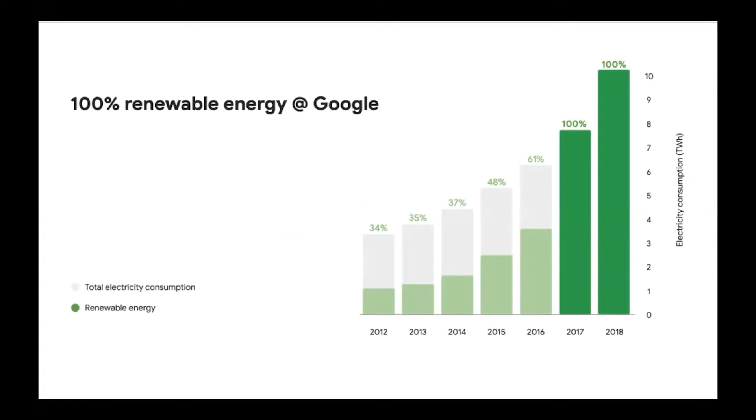With that position comes great responsibility, and we take it very seriously in plotting a chart for what we're going to do next, so that we can lead the way in showing the world how clean energy can be done. One of the biggest goals—I showed on the previous slide that we hit 100% renewable energy back in 2017 and 2018.

Continuing to meet that goal is increasingly challenging as our energy demand increases. So we look to ways to continue fulfilling our commitment to hit 100% renewable energy.

At the same time, we've also set another really ambitious goal: 24/7 carbon-free energy, meaning we want to be using carbon-free energy—wind, solar, and so on—even when the wind is not blowing and the sun is not shining. That's our next big audacious goal.

Let's talk about some trends we're seeing in the renewable energy industry and how technology is addressing them. There are three themes I'd like to talk about: one, how can we use technology to increase efficiency through visual inspections of wind farms; secondly, how can we predict failures and anomalies using technology and artificial intelligence; and third, how can we optimize energy storage through things like batteries.

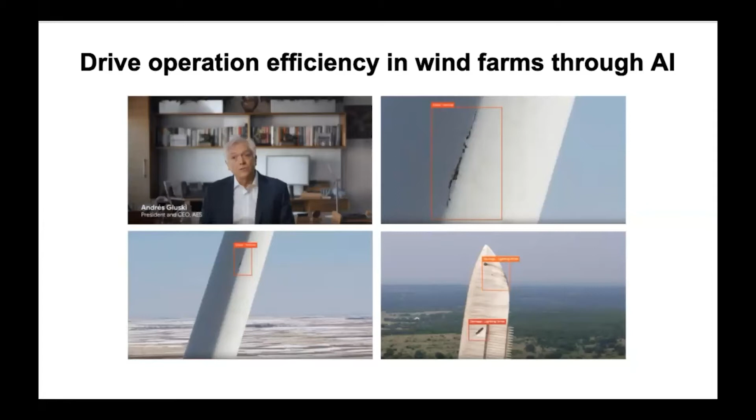Another trend is using technology to predict failures and anomalies. I talked earlier about using visual inspection AI models to identify damage to wind turbines. The overall goal is to reduce total unplanned downtime and minimize the amount of revenue loss coming from such activities.

We can combine the visual inspections from those images with additional data, combining that with the wind turbine's SCADA data to get a better picture of when things might fail. There are hundreds and hundreds of sensors in each and every wind turbine, and we can look for anomalies in that data pattern, things like vibration patterns, to see when things are getting out of whack.

When that happens, it gives us a signal that maybe there's something wrong. Combining the insights from inspecting the images of the wind turbines gives us more accuracy in predicting a potential failure, which can be really helpful in preventing catastrophic losses in a wind farm.

We also want to combine that intelligence with time-based scheduled maintenance, meaning operators of wind farms may already be planning to take down a turbine for regular maintenance, like an oil change. If we're predicting a particular turbine will fail because of these signals, we can combine that with the time-based maintenance so we're taking down the turbine hopefully just once, minimizing total unplanned downtime.

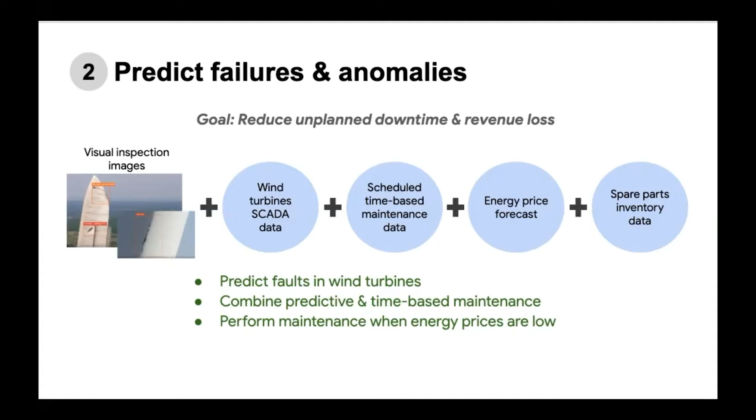Finally, you want to combine all that intelligence with your spare parts inventory, meaning if you're planning to take down a wind turbine for maintenance, you better make sure we have the spare parts in hand, so we're not caught predicting a failure but not having a certain part ready.

The third trend has to do with energy storage. We're seeing an increase in the capacity of energy storage. This chart from the IEA shows the amount of capacity for storage from 2013 to 2018.

And you can see that fairly exponential increase during these years. We're expecting that the forecast for energy storage capacity will continue to increase in the years to come. And there are several business cases for why people want to increase their capacity for energy storage.

From a power utility standpoint, batteries are useful for emergency power restoration so that if the power goes out in the grid, there's some capacity to ride through these power outages. There's also the business case of using grid energy storage to balance the intermittency of solar and wind power generation.

From a monetization perspective, there is the interest to optimize the charging and discharge cycles so that we can make the most amount of money to take advantage of fluctuations in energy prices during the course of a day. And this can happen in particular in places where there are those large fluctuations.

I know that last year there were some fairly extreme events that happened in ERCOT in the Texas area where the prices fluctuated to very high levels. So if you had an energy storage system where you can capture that energy during the lower price periods, you can sell the energy during the times when energy prices are much higher.

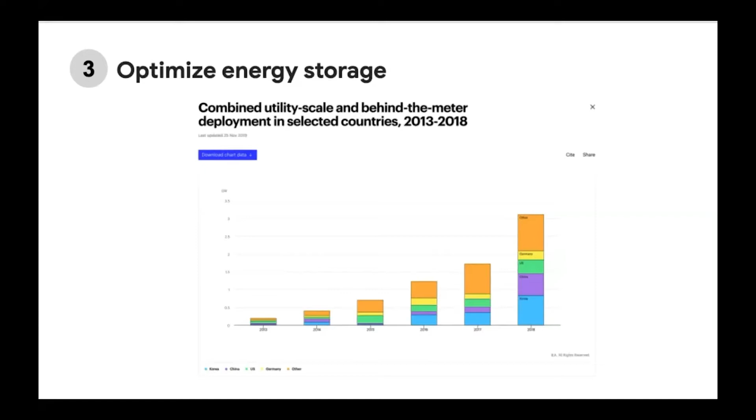And then finally, I mentioned earlier that Google has our ambition to do 24/7 carbon-free energy. We want to use carbon-free energy at all hours of the day. And we certainly know that the wind is not always blowing and the sun is not always shining. And so during those times, we want to take advantage of energy storage capabilities to help us ride those periods through.

So anyway, that is a short overview on what we're seeing in the power industry and particularly with regard to renewables. And I would welcome any questions that everyone has. Thank you.

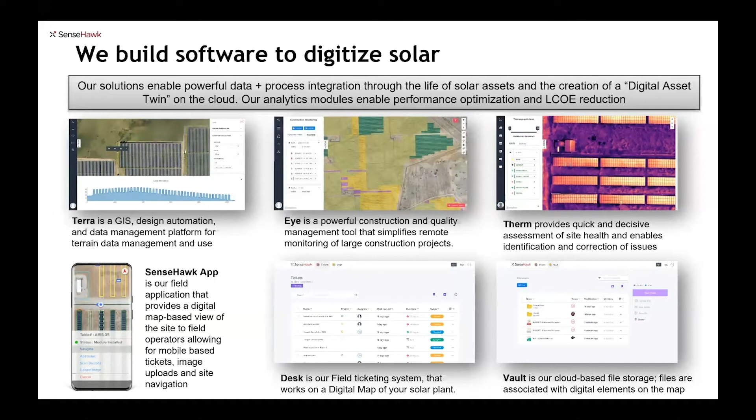App.sensehawk.com is Grand Central for all solar assets. Asset owners can look at all of their assets at different parts of the life cycle right here and click on any asset to get into detailed information.

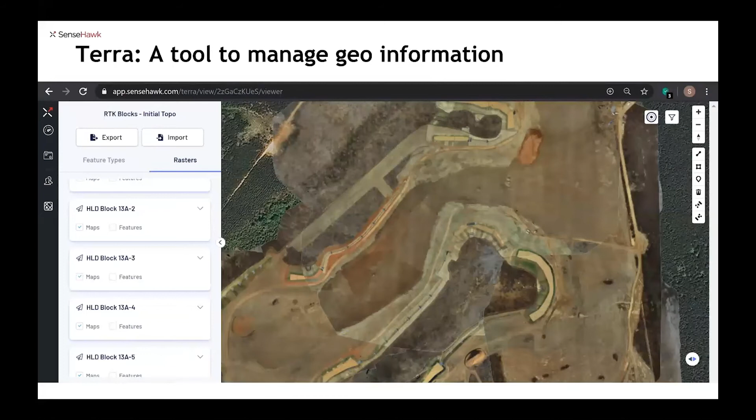Terra is a tool to manage geoinformation. You can layer in geoinformation from traditional manual surveys, from ALTA surveys, from drones at different parts of the construction life cycle. You can use this geoinformation, analyze this geoinformation to drive construction automation. Automated leveling and grading, automated pile driving, all of these are supported by our system.

Eye is a digital construction management tool bring in information from the site into offices and boardrooms, eliminating the need to travel. It combines data from drones, progress reports, information entered by site personnel, inventory, civil and electrical data, all of this together to provide a rich view of the site to stakeholders.

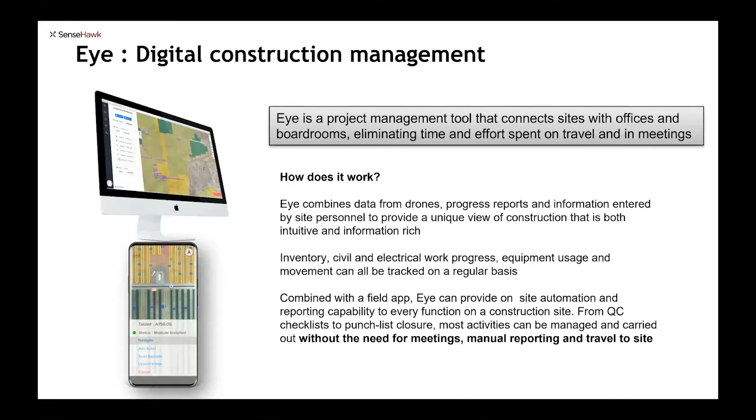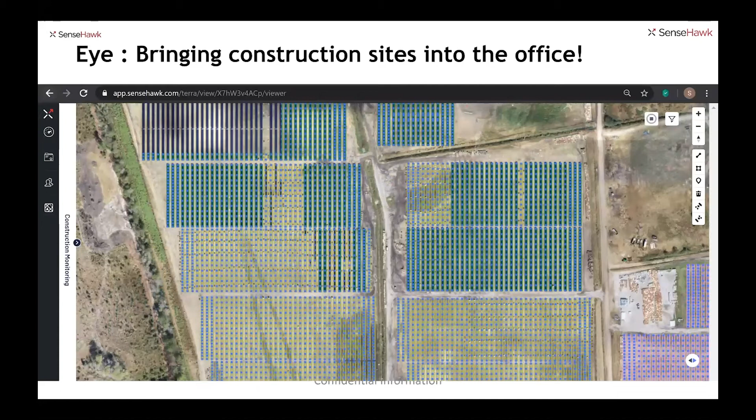Combined with the field app, Eye also provides a site automation and reporting capability to every function. So you can do QC checklists, punch list closure, most activities managed and carried out without meetings or travel. It actually brings you rich visual information from the site into the office. You can actually zoom in and see every part of your site.

Eye also supports asset information mapping. You can map serial numbers of every component on your site into the digital twin. Desk is a ticketing and work management solution written just for solar.

Combines with all of the other information we have to create a powerful work management system. It supports intuitive dashboards, enables people to monitor work sitting remotely across multiple sites. It also enables remote site management with actual visualization. You can look at your site, look at all of the issues, all of the tickets, all of the work

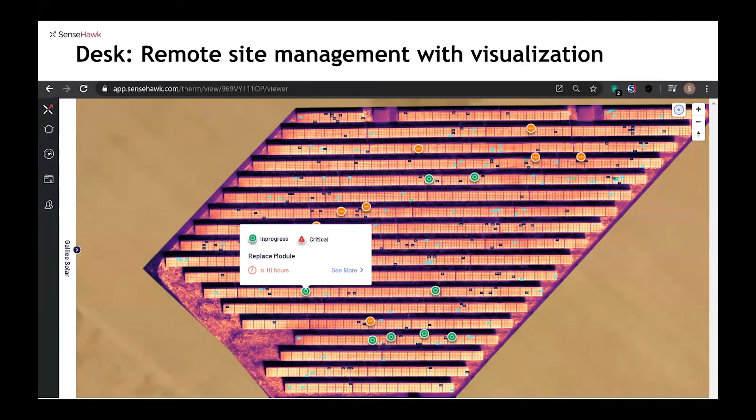allocated to personnel on the site, look for progress, look for criticality on a single screen. Vault is a data and file management system that's been written for solar, enables you to attach files to any element within the asset. This could be to an inverter, could be to a site, could be to a tracker

row, to an individual module, or the entire asset. The app is the most powerful tool in our arsenal. What it does is it brings all the information that we generate and that we analyze into the hands of people on the site. It runs on most handhelds that run Android or iOS. It's map-based. It has GPS.

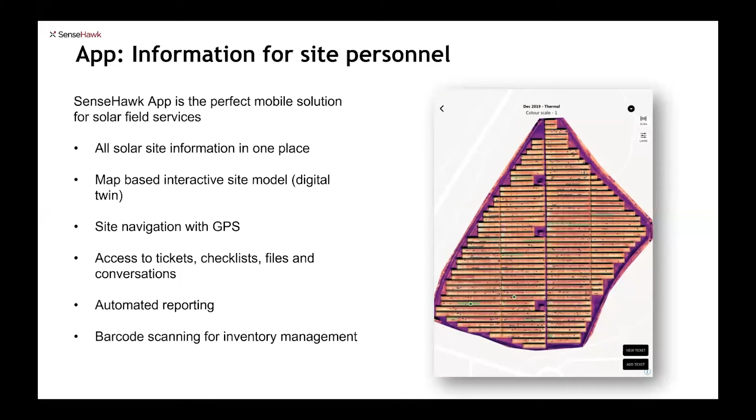Think of it as Google Maps for your sites, along with all the information for your site that you need. It's offline capable. You can create tickets, access work, access checklists. You can complete checklists. You can do automated reporting. You can access files. You can start conversation, raise issues. Anything that you need to do on site is available on the app.

What our software together can do is help you increase asset yields, enhance productivity, and improve efficiency, while at the same time reducing the need to travel to sites, reducing costs associated with all of the management of work on sites, and most of all, in the current scenario, enables you to stay safe. Thank you all for your time, and I'd love to get more questions.

We should have some more questions for you. Swaroop, do we have you on the line? Yes. Can you hear me? Yes, I can hear you loud and clear.

One of these questions coming in is, can you share more about your customer traction? Well, we have customers in 17 countries, and about 20 gigawatts of assets have been through our platform. Some of them are still being used, while others we did portions of their workflow.

Got it. And can you integrate with environmental data such as weather to build a digital twin that predicts output or performance? That's the eventual goal. Currently, we can do process data, all of the inventory and part information, technical information. We are layering SCADA data on top of this. So the next step is to add weather and other information that comes together. So the idea is one day you should be able to look at any solar site and build a unique performance model for that site based on all of the components that are on site, history of performance, and the weather and everything else.

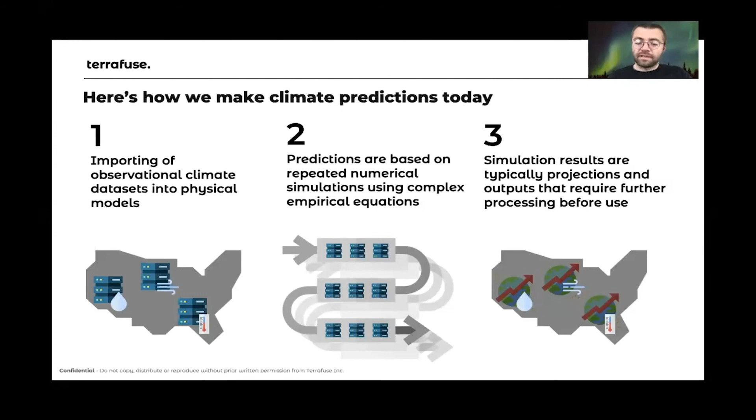This is because current technology for modeling and predicting climate is based on an antiquated paradigm of numerical modeling, whereby very complicated equations defining climate processes are encoded by hand by teams of PhDs and solved on big, expensive supercomputers that are typically outside the reach of most institutions. This is a highly computation-intense process that takes months to create predictions and simulations. It's impossible to assimilate the vast volumes of data that we're generating and collecting more and more on the Earth's climate. And even after all this work, the data that comes out of the process is still not granular enough and timely enough to inform business and policy needs to be actionable in general.

We address this issue with our AI emulation technology. An AI emulator is a machine learning architecture that learns to behave like a physical system, such as wind or wildfire. We build AI emulators by fusing together many sources of remote sensing and simulation data about climate. We use the AI emulator to scale climate prediction across large regions by learning physics in some regions and transferring that learning to other locations, making predictions without having to solve the physics.

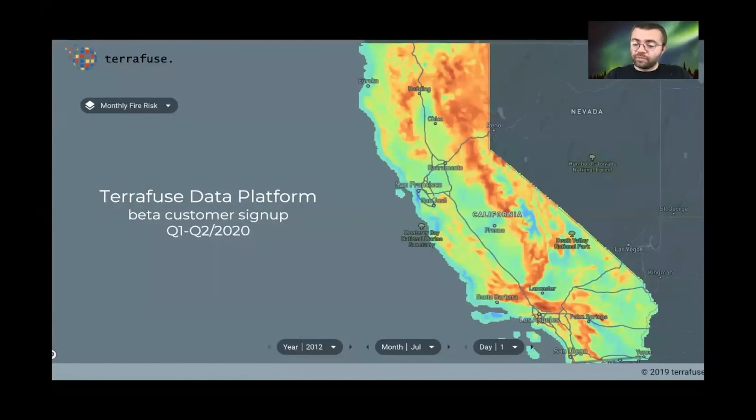We're building our minimum viable product, the TerraFuse data platform, on which the AI emulators get deployed after being validated with customers. We are developing applications around prevention, mitigation, and planning of climate risks to infrastructure, in particular renewable energy and built infrastructure for the energy and insurance markets.

Within renewable energy, we have focused on the wind generation market, which is the highest growing renewable resource at 30% year-on-year growth. We have been working with partners across the value chain of wind project development, from site assessment to operational market bidding to insuring the revenue from the wind farm, showing how our data can create value with multiple touchpoints.

A second market that we have focused on is insurance, in particular on wildfire for property and grid resilience. Wildfire has emerged as a first-tier peril in recent years, with insurance carriers incurring significant losses, especially in California and large markets such as the West.

However, all of the underwriters we've been talking to point to a lack of good data to price and select wildfire policies, leaving a lot of money on the table. So the need for more actionable climate data is evident, as our pilot projects in energy and insurance across the world show, from Asia, Europe, and the US. We have the team to build the solution for the climate prediction problem with machine learning and climate expertise, as well as clean tech go-to-market expertise. I'd be happy to take questions, so thank you for your time.

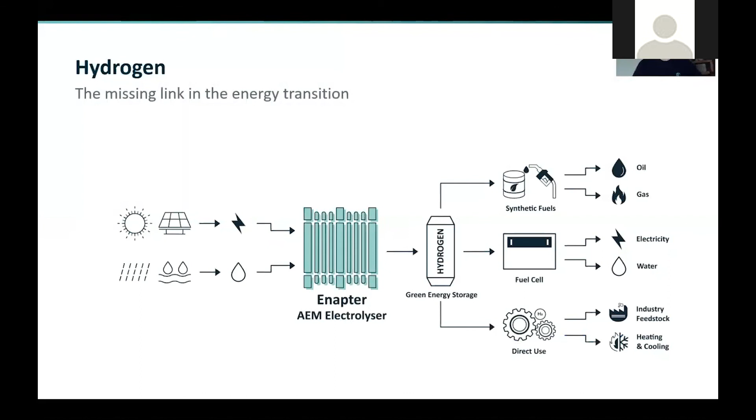Electrolyzers, our product, are a way to turn sunshine and water into a green fuel, a green gas that can be used in any kind of application, be it synthetic fuels, electricity storage, or many direct use cases in industry for heating - absolutely what we need when thinking about how to decarbonize our future. Our electrolyzer is different from what you see in the market because it is designed as a product. You can see here that it is a form factor that can easily be fitted into a 19-inch rack. It has a very low production rate with 500 norm liters per hour and a power consumption of 2.2 kilowatts.

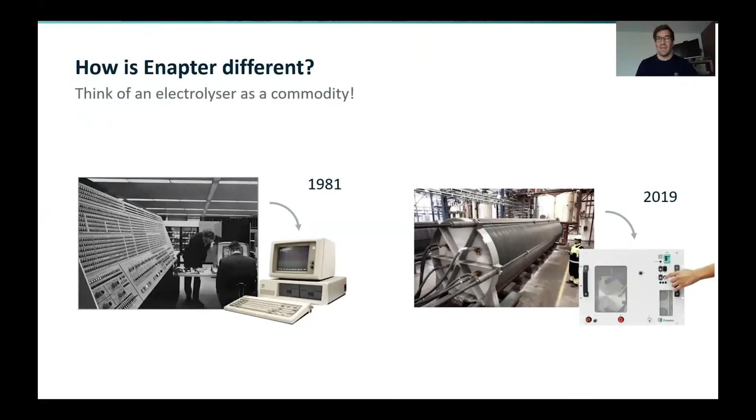But what you will immediately understand is that this device can be stacked to infinite sizes, so you can combine as many of these modules to achieve the flow rate that you need. Here it is mirroring the principle of, for example, the solar panel, which is similarly set up as a small and modular device that you can combine into any kind of size. We're different because the rest of the industry is building large systems, and the analogy here is the mainframe and the PC that disrupted the computer industry in the 80s. We hope that we have a place in the market with the offering that we can bring to our customers.

We're not only focusing on hardware, we are also very much exposed to software. We believe that energy companies of the future need to have both a hardware and a software offering. This is why we're developing a very unique energy management system that is low cost and allows residential energy storage solutions to benefit from a good energy management system, as well as industrial solutions that customers might be looking for. We have use cases already in 33 countries in the world, and I think more than 100 customers today.

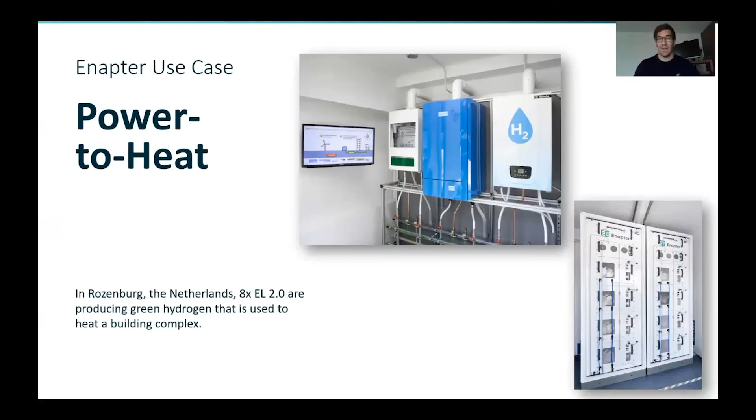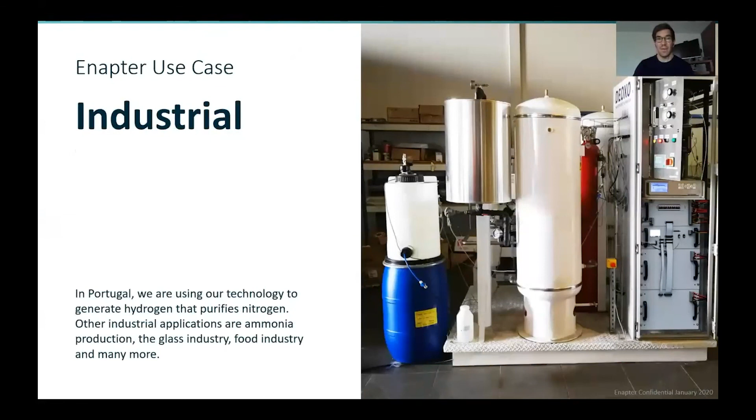We use our hydrogen refueling stations for drones, aircrafts, cars, for many different applications. We have a bunch of industrial customers who are using hydrogen in float glass manufacturing, nitrogen purification, as you can see here, but also in ammonia production and other cases. Power to gas, an important one as well.

Our goal is ultimately to drive the cost for hydrogen down to a price of 1.50 euros or less per kilogram in terms of CapEx. This requires massive scaling efforts, which is why we're investing a lot into automated production lines and ultimately make this green hydrogen reality happen. Thank you very much for your attention.

Thank you, Thomas. Are you on the line? I am. Perfect. Good morning. Yeah, good morning. So one of these questions is, how do you see the current energy markets being impacted or impacting hydrogen demand?

Well, I think hydrogen will impact the energy markets. We believe that hydrogen is the oil of the 21st century. It's the only way to decarbonize fuels and gases. So it will have a huge impact.

And somewhat of a technical question: how do you make sure that the oxygen produced during OER reactions does not reduce the efficiency of hydrogen production in the electrolyzer?

We have a very efficient process, which separates hydrogen and oxygen in the cell. Actually, our electrolyzer is one of the most efficient devices on the market if you compare it to traditional alkaline or PEM electrolyzers. This is due to the patented buildup of the stack, which produces hydrogen at differential pressure and very high purities straight from the cell.